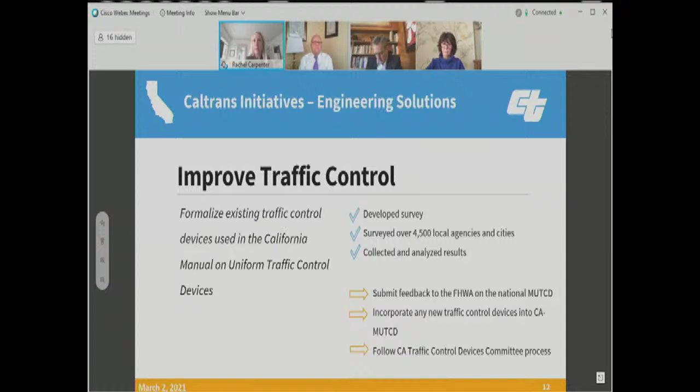Last fall, we conducted a survey of over 4,500 local agencies and cities across the state to better understand how we can improve this experimentation and approval process in order to meet their needs. We received a lot of really good feedback, and we've analyzed the results.

Some respondents indicated that we need to add standards around signs and striping for alternative transportation modes like scooters and electric bikes. Other respondents indicated that the process to add new standards is too drawn out and causes jurisdictions to use new traffic control devices without formal permission, which then increases their tort liability. Survey respondents also expressed a need for the ability to make short-term traffic safety improvements in response to an immediate need, as well as the need for quick build guidance and ped and bike improvements for urban interchanges.

Caltrans is currently submitting comments to the Federal Highway Administration regarding proposed changes to the national MUTCD, which the California MUTCD is built on and has to align with. These comments usually come from Caltrans divisions and districts, but we're also going to be incorporating relevant survey results in our submission to Federal Highway.

Once the national MUTCD is published, any new traffic control device will be adopted in the California MUTCD. If needed, we will include them in the California MUTCD after going through the California Traffic Control Devices Committee process to consult local agencies and the public.

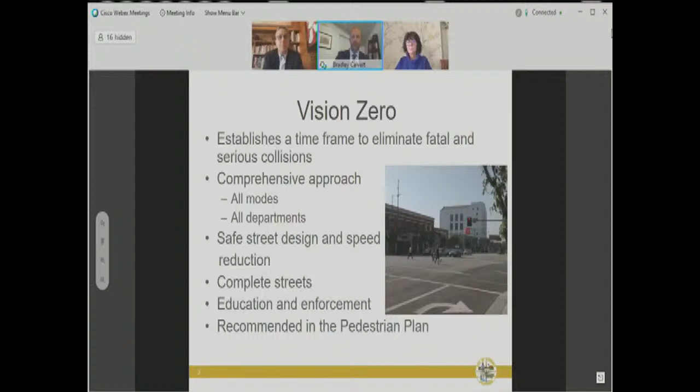And speaking of that pedestrian plan, if you recall last summer we gave a pretty in-depth presentation to go over some of the key strategies and philosophies for the pedestrian plan and the bicycle transportation plan. We gave this similar presentation to the Transportation and Parking Commission just the other week. We're going to give a bit of an abridged, truncated version since we walked through many of those strategies last time, so we'll do an overview and then provide next steps.

The pedestrian plan is broken into two parts. Part one is taking stock, assessing our existing conditions and the collision data, understanding where the hot spots are, where we're most likely to see injuries and collisions. Part two is about recommendations for infrastructure and non-infrastructure improvements. We'll briefly touch on some of those, but last summer we went in depth on concepts like curb bulb-outs, mid-block crossings, and a number of other strategies.

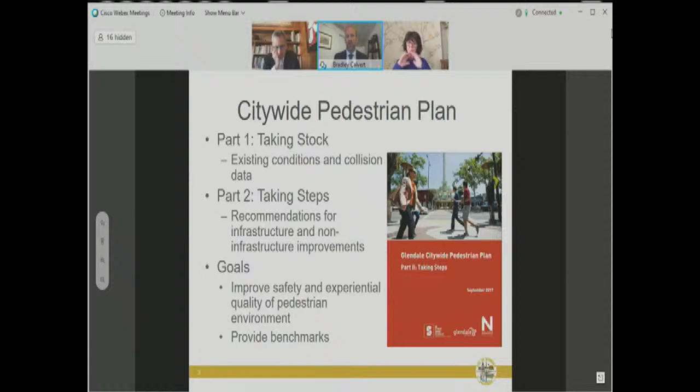The goals of all of these things are to improve the safety and the experiential quality of the pedestrian environment. I want to emphasize experiential quality, because while we can do all the safety improvements needed to make it a safer environment, the experience is what's going to encourage people to walk more—not just how safe it is, but is it an enjoyable experience? Proper lighting, proper vegetation, proper buffers—is it a walk someone wants to take? Overall, it provides goals and benchmarks for us to achieve and strive for.

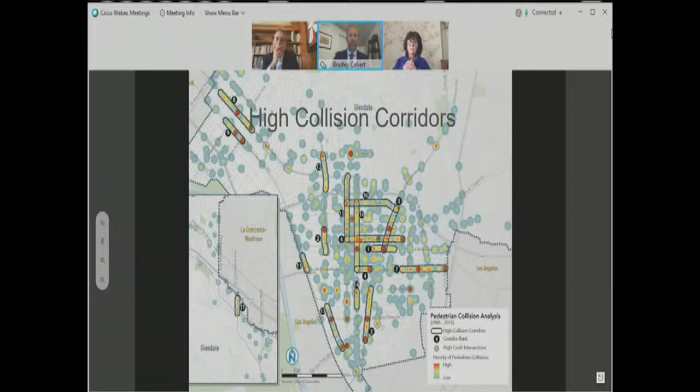Some of the improvements have already moved forward prior to the pedestrian plan.

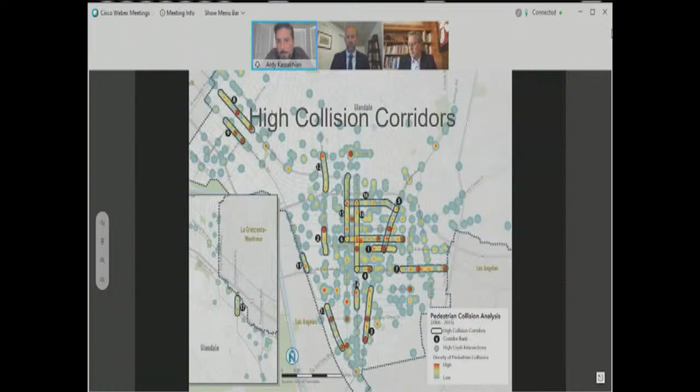Bradley, could I interrupt really quickly? Yes. I have a question with regard to that chart and the mapping of where the collisions occur—have we also done an assessment as to the time of day when most collisions occur? Is there a pattern in terms of how much vehicular traffic there is on the roads? We do have time of day data. I don't have it readily available, but I can make sure that when we come back on March 23rd for the pedestrian plan adoption, I'll present that information. Thanks—I think that's important to note because patterns matter in addressing these issues. Just the frequency of collisions isn't enough. If there's a correlation with time of day, engineers can come up with ways to address that as well. Thank you, we'll make sure to bring that back as part of that information.

One of the first things we've done was the safety education campaign—the Be Street Smart campaign we're all familiar with: medallions on the sidewalks, streetlight banners that were hung. This was intended in the spirit of Vision Zero to be education for all modes. There were banners reminding drivers of potential conflicts and collisions, to be aware of pedestrians crossing the street. The medallions reinforce good pedestrian behavior, in that spirit of Vision Zero and its education component.

There was also Safe Routes to School—pedestrian and cyclist rodeos were a portion of that, along with walking school buses. The city of Glendale has participated each year on bike and walk to school days, again reinforcing good behavior to encourage walking. We're fortunate to have a number of schools in higher density communities that present that opportunity—not many communities have that luxury. We have a good mix of land uses and locations, and we're making sure the infrastructure and education are there to continue encouraging that.

Some of the recommended improvements as part of the pedestrian plan, signaling is definitely one of them. Improving pedestrian signals includes things like default walk phases and delayed timing. Those are all intended to help convenience or give the pedestrian a head start, especially where left turns on green, right turns on green, or right turns on red are allowed. So giving that pedestrian a head start, making sure the signal is coordinated with the parallel street so they're not waiting to push a button. We've seen a big push towards that, especially during the COVID-19 pandemic, to eliminate the use of buttons to enable the crosswalks.

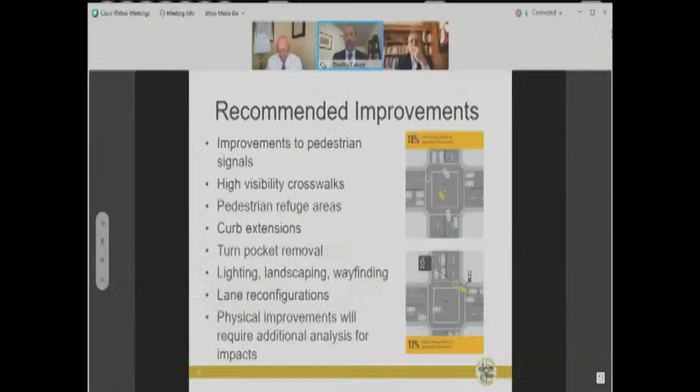They would still be able to turn with the through lane, rather than having their own dedicated lane just for turning, which is where we see more of these instances occur—it would be through the through lane. That assists in slowing down traffic, and it also assists with pedestrians crossing the street and avoiding those kinds of conflicts. So cars can still make the turn, they just wouldn't have a dedicated lane for turning.

What I would add, and this is the last bullet point on this slide, is that any physical improvements—whether taking out a turn lane, creating a curb bulb-out, or a lane reconfiguration to make room for more sidewalk or bicycle lanes—would all have to go through additional traffic analysis to justify whether it is compatible with our existing transportation fabric. So just because we adopt the pedestrian plan, which would be here in a couple weeks, doesn't mean that's exactly how those improvements would move forward. They would still be pending additional analysis and a traffic study as well.

No, but I understand what you're saying—I cannot imagine removing a turn pocket. Some places I understand, in the middle of busy Brand, around shopping areas, removing it on one of the streets is okay—they'll go to the next street, turn around, and come back. But as I said, I brought an example of San Fernando and Brand. It's very hard, I cannot imagine removing a turn pocket, whether from San Fernando Road into Brand, or from Brand turning left onto San Fernando Road. I cannot imagine it.

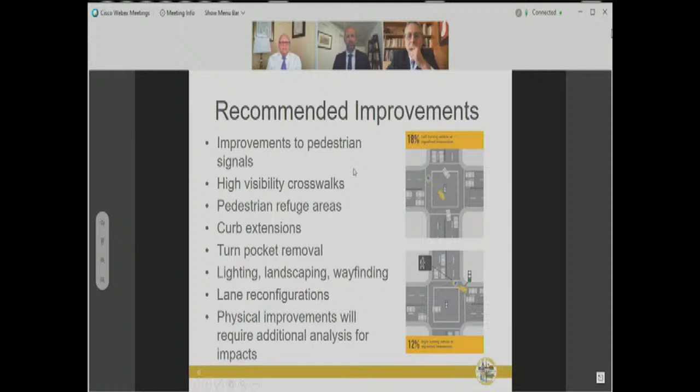I just wanted to say what you said makes sense, but there are certain turn pockets, same as Brand and Glen Oaks, I cannot imagine what will happen if we remove those. So hopefully you'll consider that, and I am satisfied with your answer. Thank you.

One of the things we brought back last summer in July was information regarding incident rate. What makes this pedestrian plan so important as we move towards adoption is that we've seen incidents go up. We only had a projection last summer, knowing it would be a little higher for 2019, but hopefully within the range of what we saw in 2017 and 2018. It turned out 2019 was not the case for us. This was our second highest incident rate since 2013, our third since 2003.

So it shows we definitely need to consider these improvements, and in many cases implement a number of them. We saw a dramatic rise in 2019. What we've found is this also correlates with both the decline and rise at the end of the safety education campaign, which I'll touch on in a moment. But 2019 for pedestrian collisions was not a good year for us, and definitely shows the need to move forward with the citywide pedestrian plan in the same spirit as the bicycle transportation plan, because we've seen decline and stabilization of the incident rate for those, which I'll cover in a moment.

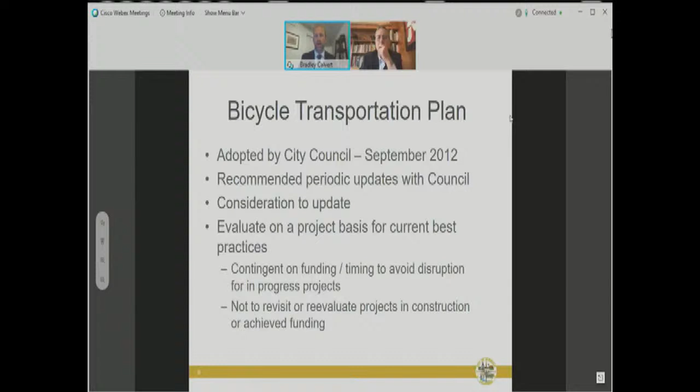But if there's an opportunity and we see a project on the radar, and we know there could be another potential alternative, this would be a good time for us to take a look at that before securing funding, before completing construction documents. So that's the approach we're taking right now with the bicycle transportation plan, knowing we don't quite have the capacity or funding to execute a full adoption right now, to consider projects on a project-by-project level where applicable. Again, it doesn't mean reconsidering every project that comes forward, but there may be opportunities where we can pursue best practices or make updates. But really the purpose of this plan is to create a network of routes.

Rather than just discrete lanes, discrete facilities, this allows our residents and users to move north, south, east, west, from employment centers to commercial centers to residential centers with a connected network of bicycle facilities. It's also looking to improve existing facilities, new routes that will link major activity centers, but also provide amenities. This isn't just about providing a bike lane or a sharrow. We need to provide secure bicycle parking, and those kinds of amenities, so that it encourages riders and users of the network.

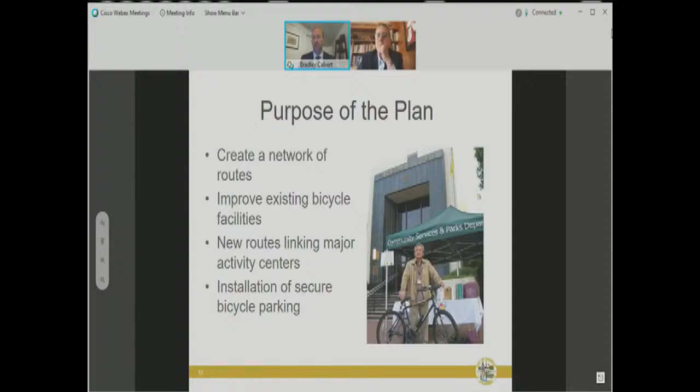So just a kind of overview of what those facilities can look like. A class 1 route is a paved right-of-way which is separated from traffic, similar to the Riverwalk. Class 2 is a restricted right-of-way - you can see in that lower image there - it's a dedicated space, typically separated by a painted line, that is a lane for bicyclists, very similar to what we may see on, say, Central. Class 3 routes are sharrows, and that's painting that symbol you actually see in the lower image in the street to designate this is a shared route and shared path for both motorists and cyclists, intended to raise awareness for motorists.

There's also a class 4, and this was adopted by the state in 2016. Design standards were released in 2018, but this is really about creating a protected, restricted right-of-way. That's not currently in our plan, because our plan was from 2012. But these class 4 facilities are really about having some sort of physical barrier separation in a bike lane, such as you see on the lower right. There's some sort of curb that separates - they could be planting boxes, it could be parked cars. There's a number of different strategies.

So that's something we could evaluate as we look at projects as they move forward, if there's an opportunity to do that, even if it's not currently part of the plan. It's also something we'd probably like to see amended into the plan to incorporate these sort of facilities, because they're starting to emerge and have emerged as the best practice and the best means to provide safety. This is something we're considering as part of the West Glendale Sustainable Transportation and Land Use Study that we hope to bring forward in the coming months to City Council. There are some design alternatives that do incorporate class 4 bicycle facilities to really enhance that corridor for cyclist safety.

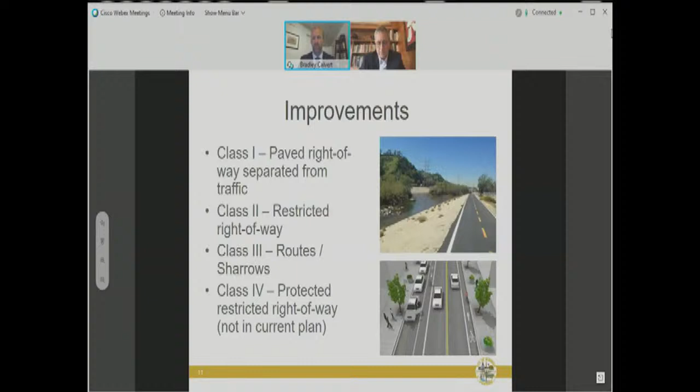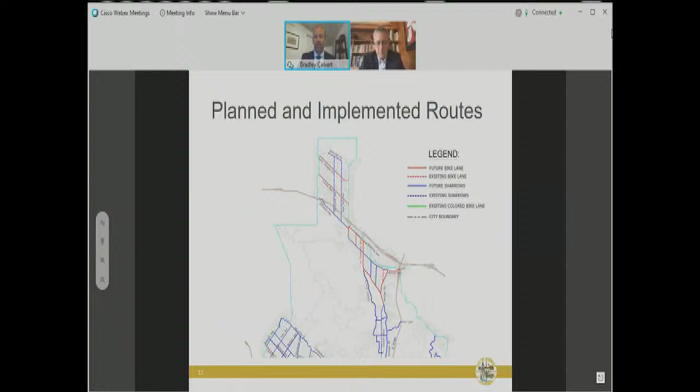This is just a map that illustrates planned and implemented bicycle infrastructure. You can see that a number of networks have been completed, some are also in the works. Public Works is also going to be giving an update on some of those projects that have been completed as part of implementation. This is the map of the southern portion of the city, which also highlights that network.

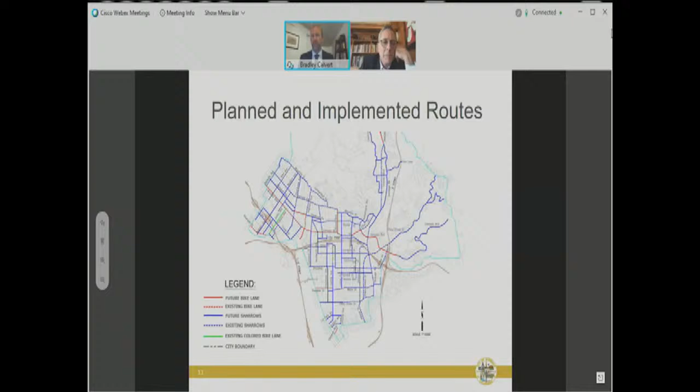Especially with Sharrows, you can see that Glen Oaks is also highlighted as a future or existing bicycle lane. But this is one of those opportunities where we do see moving beyond just what the plan recommends and looking at something like a Class 4 bicycle facility. With BRT coming, it's an excellent opportunity for us to enhance this and also to employ best practices.

The bicycle transportation plan, in our opinion, has worked effectively. In 2012, we did see a peak in the total number of incidents and collisions, and we have seen a steady decline since then. Granted, 2019 went up slightly compared to 2018, but was still below 2017, really below every year's level with the exception of 2018. So we do believe that the work put forth in that plan, and the work Public Works has put forth towards implementation, has done what it's intended to do, and that's improve the bicycle infrastructure and the environment as well as the safety for users.

So what I'd like to do is turn it over to Edward Hitti from Public Works, and he is going to go over the process for the improvements and implementation, as well as some of the projects that have been completed. Thank you, Bradley.

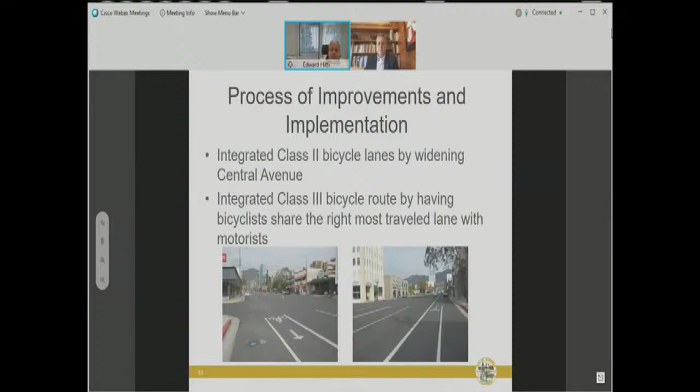Next slide, please. Mr. Hitti, may I ask you something? I'm not sure if you need the picture you were showing.

What's the difference when the bike lane is colored green and there are some bike lanes with no color on them?

Sure, this is only for visibility. They are both designed the same way - the bike lane is still Class 2, whether colored or not. This is one of the improvements to bring up the visibility of that lane and to better define the limit of the travel lane from the bicycle lane, as well as because back then, and still now, we don't have the buffer zone, typically 2 to 3 feet between the bike lane and the travel lane. That's another idea that came up - to paint that lane.

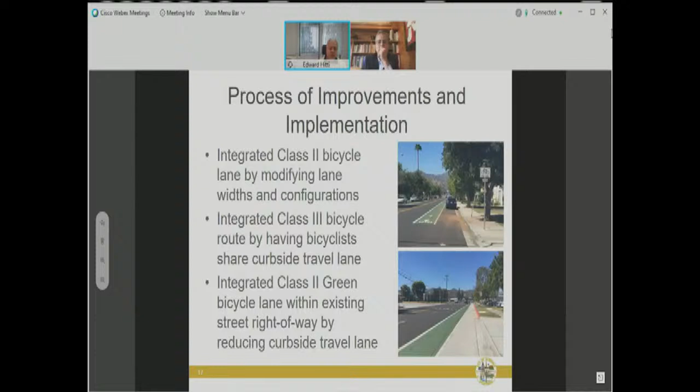Next slide, please. I believe on the... Thank you. This is what we call it.

This only sees interaction with traffic if it reaches an intersection and crosses that road to continue, let's say, to the other side of the channel, or in a case like this, if there's any off-road bike trail. Next slide, please.

This is the Highland Avenue Rehab Project, where we were able to integrate a Class 2 bicycle lane by modifying lane width and configuration. On Highland between San Fernando and Burchett, we changed the width from 15 feet down to 10 feet. However, due to restrictions mentioned earlier on how much we can modify the lane or sidewalk, in this case we're stuck because we have a minimum 10 foot travel lane.

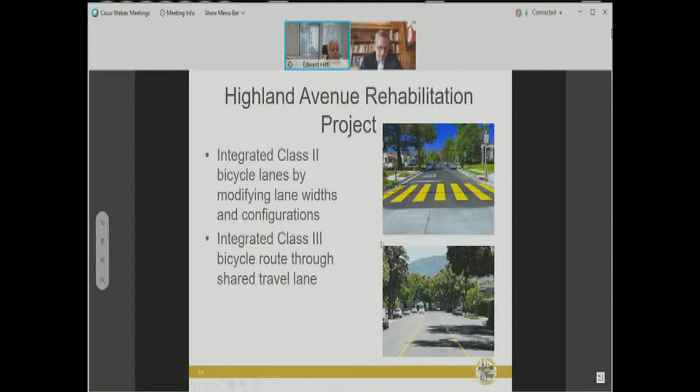This slide covers two projects. The first one, the Kenneth Road Class 3 bicycle route, has bicyclists share the travel lane with motorists. It's a pretty narrow street, with the street width from curb to curb only 36 feet. Typical standard for a local street is 40 feet, and the travel lane only 10 feet. That's why we're only able to accommodate the travel lane as a Class 3 bicycle route, completing almost 0.9 miles.

The Ocean View Boulevard Rehab Project is where we integrate a Class 2 bicycle lane with the existing right-of-way by decreasing the travel lane in this area, with a right-of-way width of 46 feet, and we're able to complete approximately one-third of a mile of Class 2 bike lane.

And I will turn it over to Mr. Calvert. If you have any questions, I'm happy to answer.

Are we finished with the bicycle plan? I've been holding my questions. Mr. Brotman, yes, that's the last slide for the bicycle transportation plan. Okay. Mr. Mayor, may I ask some questions? Yes, please, Councilmember Brotman.

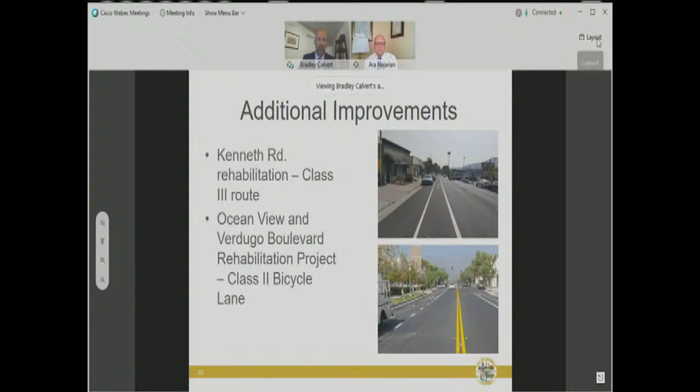So the next topic here, we'll keep this relatively brief on slow streets because we are coming back later on this evening for this. This is a council-directed program. This was partially in response to the COVID-19 pandemic, recognizing that there were more cyclists, more pedestrians using the right-of-way, especially when they were trying to maintain safe social distancing, but also just getting out of their house more often. The goal here was really to increase the awareness of those alternative modes of transportation using the right-of-way. We had established a city website for applications to be submitted to have these signs installed.

Overall, we created the sign and offered a feedback email address so residents could let us know if they were running into any issues, or if they were just working, and whether or not this was an effective means to help slow down traffic. Overall, we received 96 applications, 85 of which were approved.

We used criteria to establish where they could go, essentially ruling out major thoroughfares like Central Avenue in downtown and Glen Oaks Boulevard, recognizing those were not appropriate locations for these signs. The signs were placed on A-frames with preference given to placing them in the center of the street.

This is an example of one that was installed. This was actually a great place to put it. As you can see, this street is absent of sidewalks, and while we were out there taking photographs, we could see people using it. So the preference was to put it at the stop line in the middle of the intersection to really slow down cars, especially when they were making turns. That was the important part here.

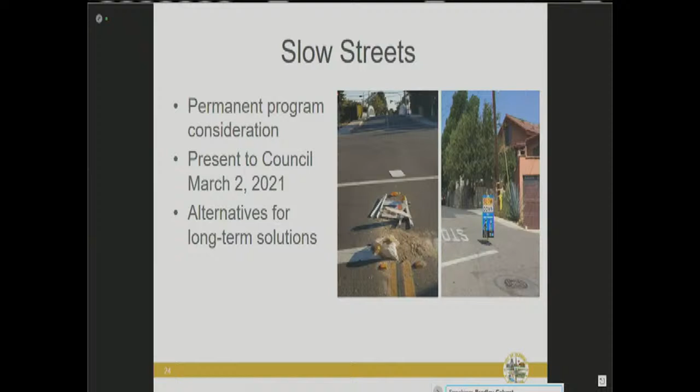But tonight we'll give more of an update. Public Works will also assist with how that implementation went and what those different alternatives look like for a permanent program. So now I'd like to turn this over to Public Works so they can give an update on the citywide traffic study.

Thank you, Bradley. And this slide will really explain the background of why a citywide traffic study is needed.

The regional transit project addresses long-range congestion issues and offers other modes of travel. However, a more near-term assessment is needed to evaluate and manage present-day transportation operational issues. Future regional transit system improvements, such as the streetcar project and bus rapid transit, address long-range congestion issues in the city of Glendale and will offer alternate forms of mobility to the public.

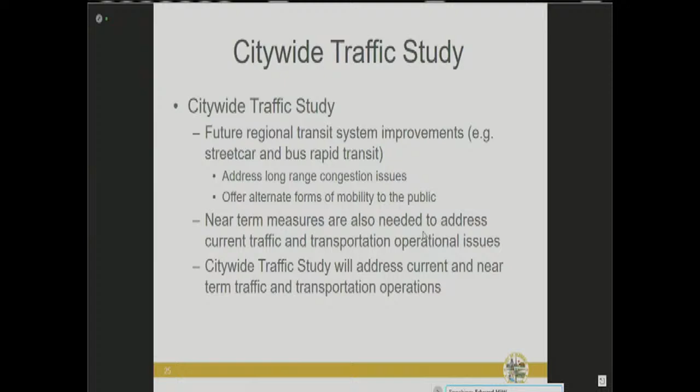However, there's a need to assess near-term future measures that address current traffic and transportation operational issues. The proposed citywide traffic study addresses current and near-term future traffic and transportation operations, and will provide the data and tools to help make data-driven decisions on managing current issues. If you go to the next slide, please.

Here we touch on the objectives of the citywide traffic study, which are to provide detailed system-wide transportation analysis of the current and near future system, to provide the quantitative data required to understand and evaluate system needs, benefits, and impacts of transportation projects, as well as balance the needs of multiple modes of travel within the system.

This slide provides an overview of the objectives of the citywide traffic study. The study will provide a detailed analysis of the existing transportation system, focusing on the immediate and near-term health of traffic circulation within the city. It will offer a quantitative view of current transportation issues, impacts, concerns, trends, system capacity surplus, and shortfalls. The data generated will provide the baseline condition to assist leadership and staff in making informed, data-driven decisions about proposed transportation projects, ensure efficient and effective use of budgetary resources, and balance the needs of multiple modes of travel.

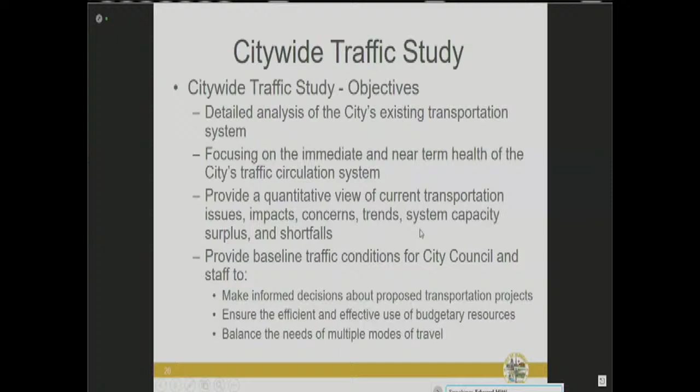The study will include a traffic volume monitoring program and will develop a computer model for use in assessing the impacts of transportation projects, providing potential alternatives and solutions to alleviate current and near-term traffic congestion. The study will also use the citywide computer model to analyze intersection and street segment traffic operations, providing the data needed to identify and resolve traffic congestion issues.

Recent traffic volume data will be compared to previous years' data to address traffic flow pattern changes resulting from the COVID-19 pandemic. Lastly, the study will review emergency vehicle traffic flow and outline opportunities for improving response time using current emergency vehicle preemption technology.

That concludes this segment of the presentation. If you have any questions, I'm available to answer.

Is there any question from Mr. Hitti? Mr. Hitti, does anybody have a question? Yeah, I have a question. Yes, Mr. Brotman. Hi, Edward.

So in this study, when you're looking at solutions to address congestion, are you going to be screening them through the lens of how they impact safety, as we were just discussing, and vehicle miles traveled? I want to make sure we do that, because there will sometimes be solutions that involve trade-offs, and we need to be able to make those judgments explicitly.

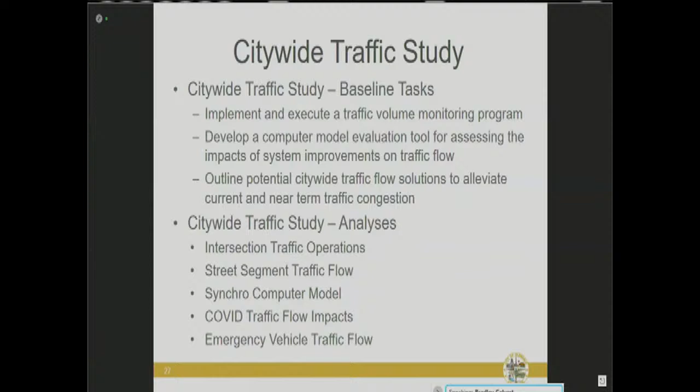What's next? We have just a couple more items to touch on as part of this mobility study session, just some of the things that are coming up as well.

One quick update: you heard about this last summer, we gave an update on the SB 743 compliance. We've heard it mentioned here several times this afternoon about that transition from level of service measurement to vehicle miles traveled. We presented that update back in the summer. The goal here is to really try to more fairly evaluate how we do travel as individuals and offer mitigation measures that include all modes of transportation, not just roadway and intersection improvements. As presented last summer, we have completed that work in terms of identifying thresholds.

We are finalizing mitigation strategies, and we will be ready to use this for any potential upcoming and future projects. There will also be a development tool included as part of this, so that those proposing projects will have the ability to understand exactly their VMT impact. As you heard, it does not mean we completely lose level of service analysis. That is still something we reserve the right to use at a local level, particularly for intersections or curb cuts, things of that nature. So that information will still come forward as part of projects as well.

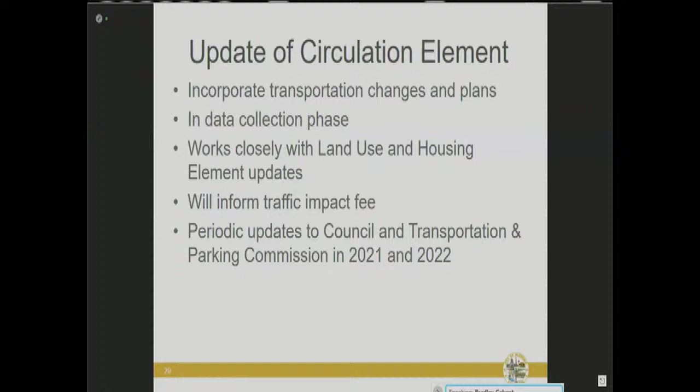We are also working on the update of the circulation element. The goal here is to really incorporate many of the things we are talking about today: improvements for bicycle transportation infrastructure, pedestrian improvements, the streetcar study, BRT. This works closely with our land use and housing element update, and will also help inform the traffic impact fee we plan to bring forward to council next year. This will include periodic updates to council. We want to make sure you stay up to date and in the loop, as well as the Transportation and Parking Commission, throughout this year and next year. Right now we are just in the data collection phase, working with outcomes from the land use and housing element update that will help inform the circulation element update.

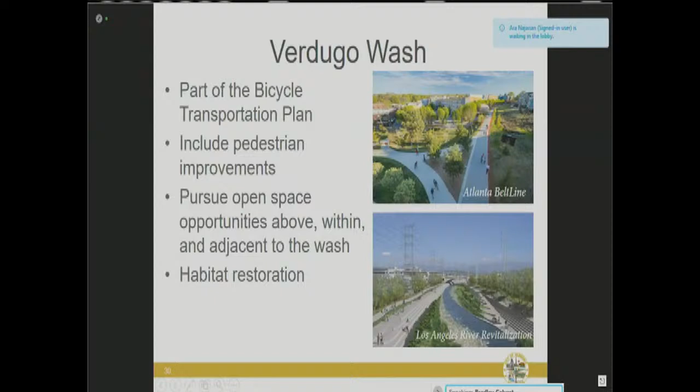Just a quick update on the Verdugo Wash. As you're aware, this is part of the bicycle transportation plan. The goal here is to also include pedestrian improvements, but to also pursue opportunities for open space above, adjacent to, or within the wash. This will also look at habitat restoration as well. In terms of timeline, with this serving as a multimodal transportation infrastructure and open space project, it touches a number of neighborhoods in the city—up to 15, if I'm not mistaken. The goal here is to create a unique and memorable experience.

So we will have extensive outreach. This is something we anticipate to launch in the coming months. We hope to do field visits, virtual interviews, and public engagement events to help kick this design process off. As you're aware, back in October we awarded the contract to the firm Milk and their subconsultant team, Buro Happold, a local engineering firm, to help us realize the vision. The image you see in the background is an important one that embodies the goals and objectives of this project. You can see this was a restoration of an old parking lot and storm drainage lot, and they were able to restore the natural habitat to perform its duties as a flood control measure, but also incorporate recreational and multimodal transportation opportunities.

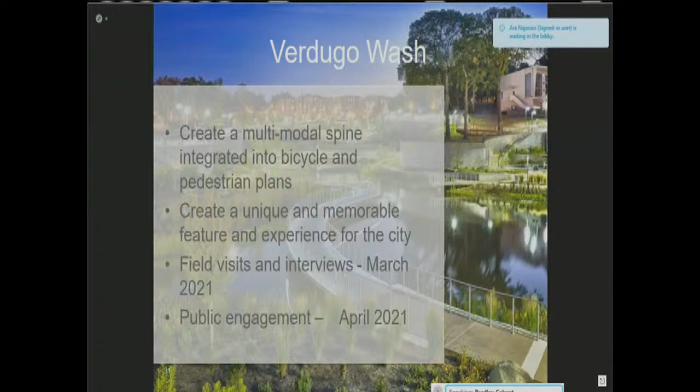Coming forward to Council on March 9th will be shared mobility. Council had instructed staff to issue an RFP pursuing at least 2 vendors to provide shared mobility devices for the city of Glendale. This was to be split between bicycles and scooters, potentially. The potential vendors were asked to submit separate proposals for bicycles and scooters. This is really to start what we would consider a 12-month pilot program to evaluate whether shared mobility is something that could work in the city of Glendale, fit into our transportation infrastructure, and be used with the intent we hope—that kind of first and last mile connectivity. So that is something we will be bringing back to council in the coming weeks.

They were to serve as a framework as we work with the selected vendors based on the outcome of the March 9th council date. From there, we would come back with the recommended vendors on March 9th, and following that selection, we would come back with refined regulations based on feedback from vendors and any additional feedback from council. There will also be discussion of changing certain ordinances to ensure proper riding.

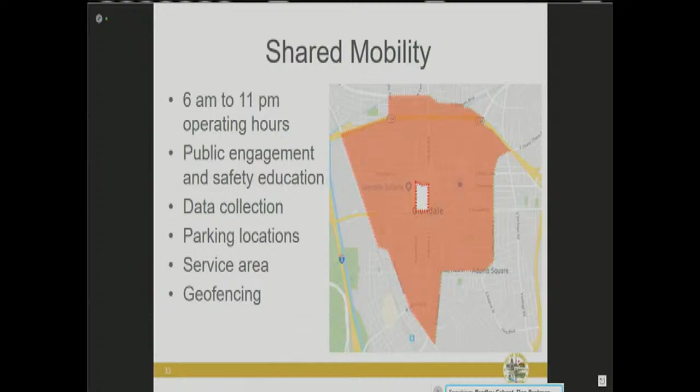So the renter should be very careful then, right? That would be hard. Yes, they may forget, or the watch they have doesn't work properly. I don't know if they look at their telephone these days. They will know what time it is, but I don't know if they will be able to pinpoint that they come back at 11 p.m. and drop it exactly at that second. I think that will be a problem, but...